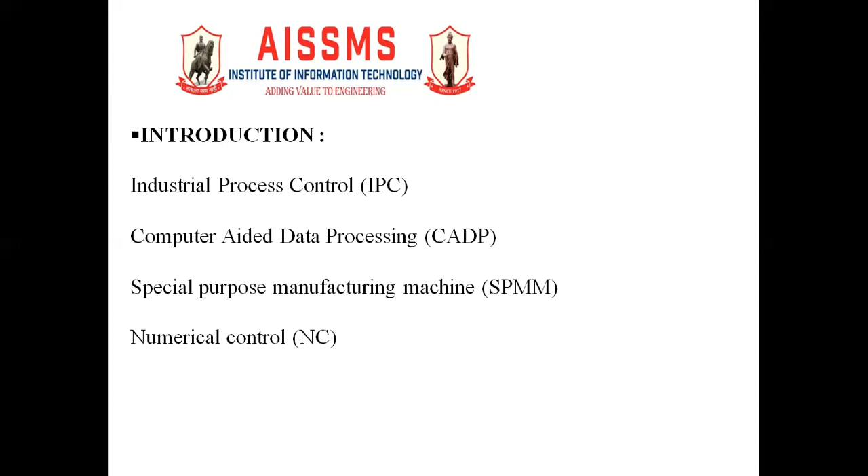Numerical control we will see later in detail. Numerical means by using punch cards or paper tapes, we make the programming, and that programming is generally used for manufacturing different types of components.

First, historical background of CNC machine: in 1940, the U.S. Air Force, after World War II, designed equipment to ensure quality in production of complex components of curved shape.

In 1940, the US Air Force used these for manufacturing different types of helicopter rotors.

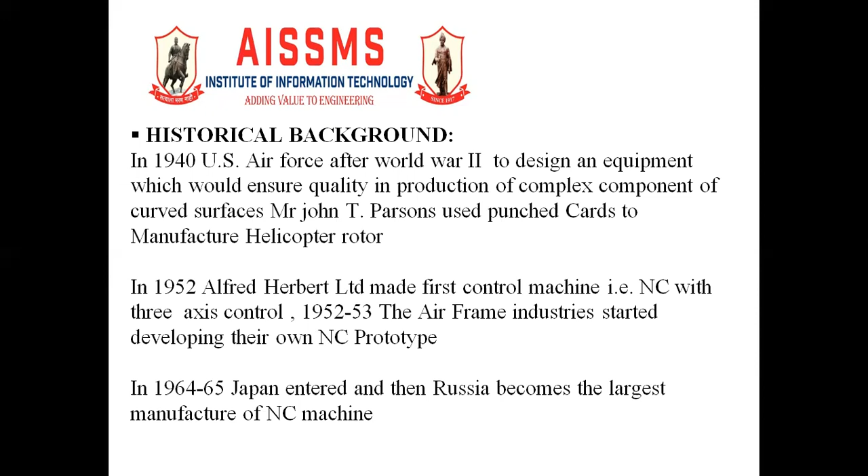After that, in 1952, Alfred Herbert Limited was the first to manufacture a control machine, and they also manufactured some prototypes of NC machines. Later, Japan entered, and then Russia became the largest manufacturer of NC machines.

Then, construction components of NC machine: the first is the software. We require software to convert analog to digital and digital to analog.

Then the machine control unit, called MCU, is the heart of the CNC machine, and another component is the machine tool.

There is X, Y, and Z axis movement, and different types of controls are attached to the machine tool. Therefore, this is a construction part of the NC machine.

Then, if you see in this figure, there is a product drawing. First we make the product drawing to find out the coordinates.

Then, according to the coordinates, we make the part programming, and after that part programming, we prepare the manuscript. There are different types of holes on that, and this manuscript is what we are preparing for the programming.

Those manuscripts are fed into the computer in terms of paper tape, and whenever it is fed in the computer, it is readable, and when it is read, then two-axis motion occurs.

This is the axis. The machine tool has 2 or 3 axes, and the machine control unit is nothing but the heart of that engine.

We need some interface between the machine control unit and the computer. Those are fed by the manuscript, and we can manufacture this type of product.

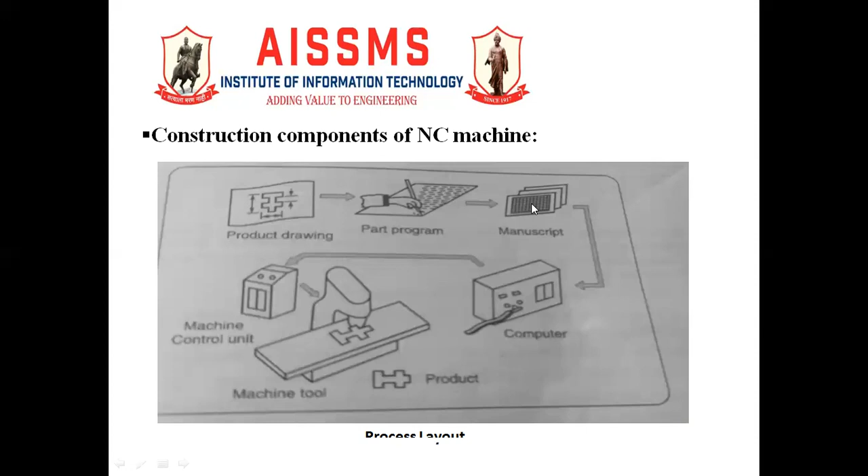But today, the machine control is combined with the computer, which has large storage capacity. That is why we no longer require the manuscript today. This is one of the advantages of CNC machine over the NC machine.

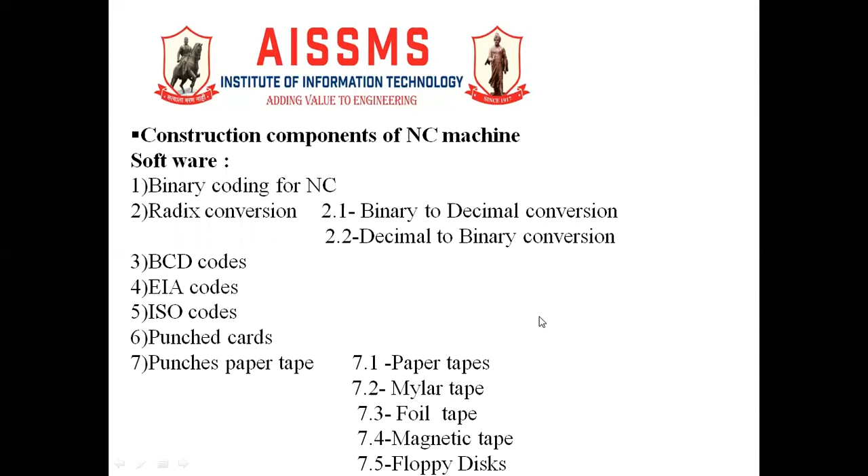Construction component of NC machine includes software, binary coding for NC, and radix conversion like binary to decimal, and decimal to binary. Then BCD codes, EIA codes, ISO codes, punch cards and punch tape, paper tapes, mylar tape, foil tapes, and different types of tapes. These are now used, along with floppy disk and magnetic tape.

Another construction component of NC machine: the Machine Control Unit, which is another heart of the CNC machine. Every NC machine has a main unit called MCU, and MCU has different types: housed MCU, swing-around MCU, and standalone MCU.

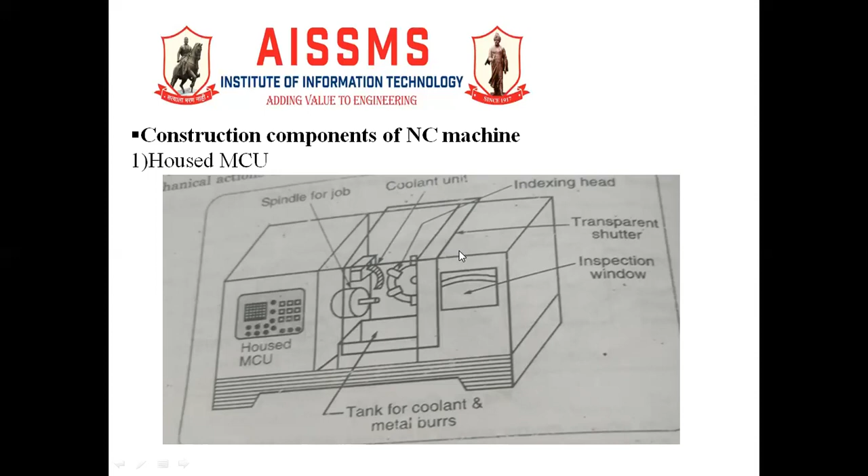This is the housed MCU. If you see, this housed MCU is inside the machine tool. That is why it is called a housed MCU.

Next is the swing-around type. During programming and setting, this swing arm moves toward the table also. This is one of the advantages of the swing-around MCU.

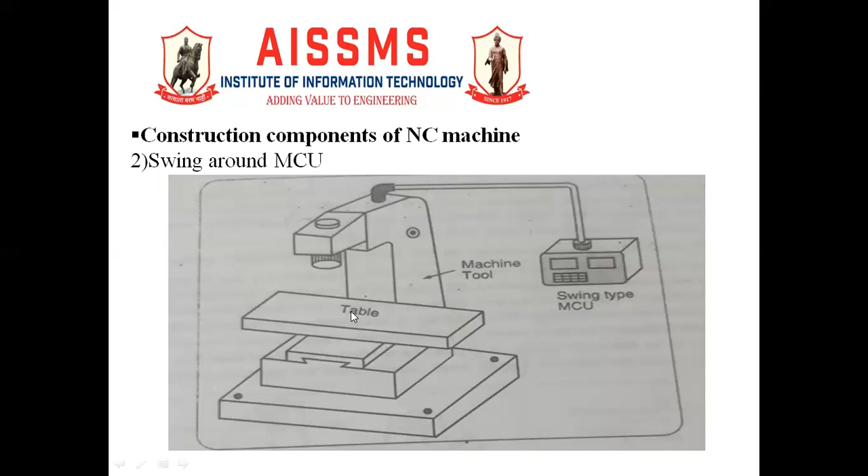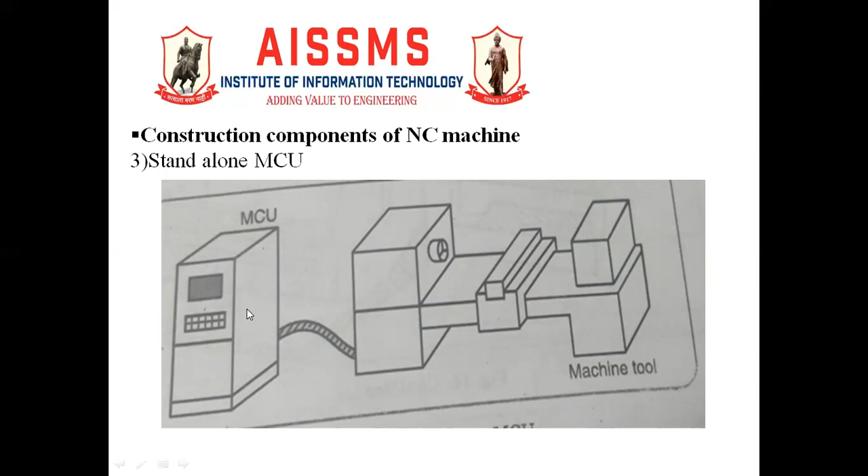This type is generally used for trainer purposes, provided in terms of a desktop cabinet. Whenever the desktop type of machine is there, this type of MCU is a standalone MCU, generally used for the trainer purpose.

Advantages of NC machine: smaller batches. We can manufacture very smaller batches, increasing the flexibility because many complex jobs can be manufactured on the NC machine. That is why it increases flexibility, allowing production of complex jobs that are not manufactured by conventional machines.

Elimination of special jigs and fixtures. Everybody knows the difference between a jig and a fixture: jigs give direction and hold the workpiece, while fixtures only hold the workpiece. Those are now eliminated, and we can make modular fixtures instead.

Next is machining accuracy. This is not achieved on conventional machines because different operators have different skills. That is why machining accuracy is one of the important advantages of NC machines over conventional ones.

Lesser scrap is generated compared to conventional machines. Longer tool life, because modular tooling is used and we can monitor the tool and its tool life, giving us longer tool life.

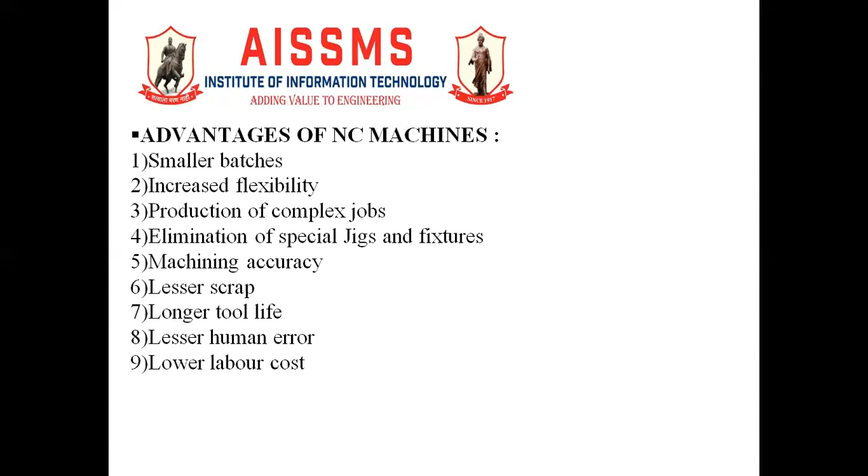Lesser human error, because only the program is fed and it is foolproof programming. That is why there is lesser human error, one of the advantages of NC machines. Lower labor cost, because we can use lower-skilled or unskilled labor, making the cost lower compared to conventional machines.

Diagnostics for maintenance purposes: if malfunctioning occurs during machining, it is directly shown on the monitor of the CNC machine. That is one of the advantages.

Conversion of units is also one of the advantages, meaning millimeter to inch and inch to millimeter conversion, along with integration with DNC systems. Next is the disadvantages of CNC.

High initial cost. Everybody knows the cost is higher. Initial cost is higher compared to conventional machines, up to 25 lakhs for VMC initial cost and 15 lakhs for CNC turning center.

Higher maintenance cost, because it is operated using pneumatic and hydraulic systems, making the cost higher. Skilled CNC personnel are generally required because the programmer needs to be a skillful person. The machine also has to be installed in an air-conditioned environment, which is a disadvantage of the CNC machine.